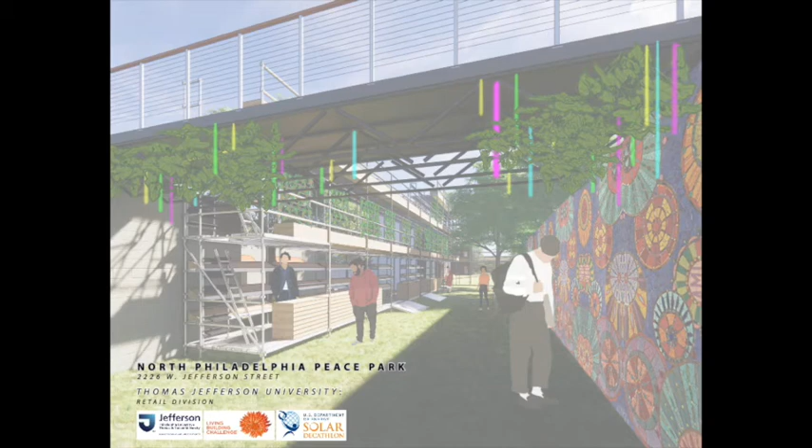Our project is called the North Philadelphia Peace Park, located at 2226 West Jefferson Street in Philadelphia, PA. We're the Thomas Jefferson University Retail Division of the Solar Decathlon.

The North Philadelphia Peace Park is an existing park located on Jefferson Street in the neighborhood of Sharswood of North Philadelphia. This site was once trash-filled lots, until local Sharswood residents created Peace Park in 2012 by developing a garden in the shape of a peace sign. Since then, the North Philadelphia Peace Park has been utilized by its local community to expand cultural and horticultural advances to the region through local events.

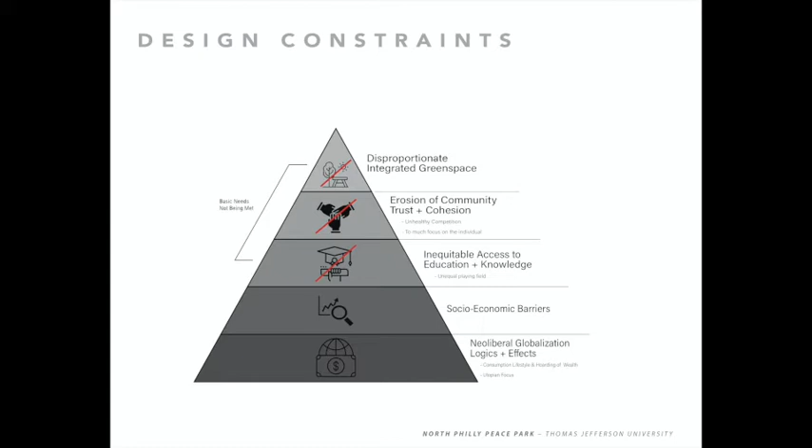The basic needs of this community are not being met. This is seen through the disproportionate integrated green space, erosion of community trust and cohesion, inequitable access to education and knowledge, socioeconomic barriers, and neoliberal globalization logics and effects.

This region in Philadelphia is a part of a largely underfunded area that is mostly owned by the local housing authority, Philadelphia Housing Authority. This has led to low local development and an influx of gentrification in the area. PHA has recently made a commitment to allowing Peace Park to not only remain, but expand across the whole block. Peace Park and the local Sharswood area strives to maintain and grow a community-centered space that can provide a home for its cultural, horticultural, and educational events.

This project will serve the local community through repurposing current buildings on site and providing produce to the local Sharswood community, which is in a food desert. Based on the team's analysis, the walkability assessment shows lack in markets and/or grocery stores within the community. This makes it very difficult for residents to have access to fresh produce.

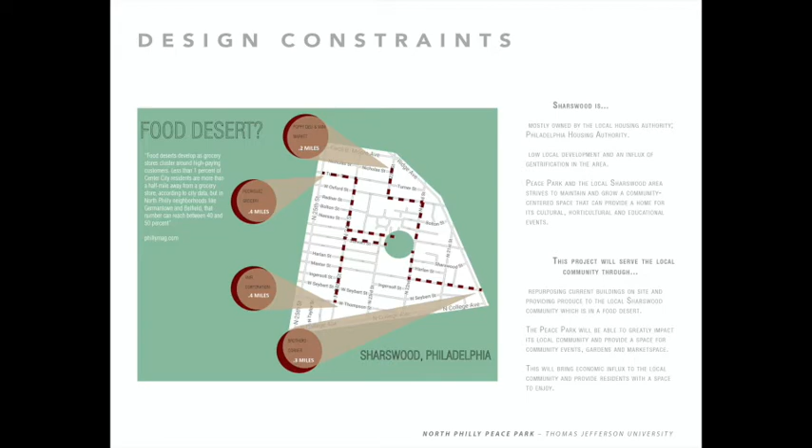The Peace Park will be able to greatly impact its local community and provide a space for community events, gardens, and market space. This will bring economic influx to the local community and provide residents with a space to enjoy. Eliminating the stress of affording food for a local community will give Sharswood residents one less challenge to face.

The design goals for this project fall around our 10 core values of ethical housing design, which include the centralization of small-scale communities, urban permaculture, expanding the access of greener urban landscapes, housing security, aging in place, regenerative architecture techniques, shared spaces, site-specific design, and multi-generational and multicultural interactions, which will all help to create a new ecological dialogue through community-based design of urban agricultural retail.

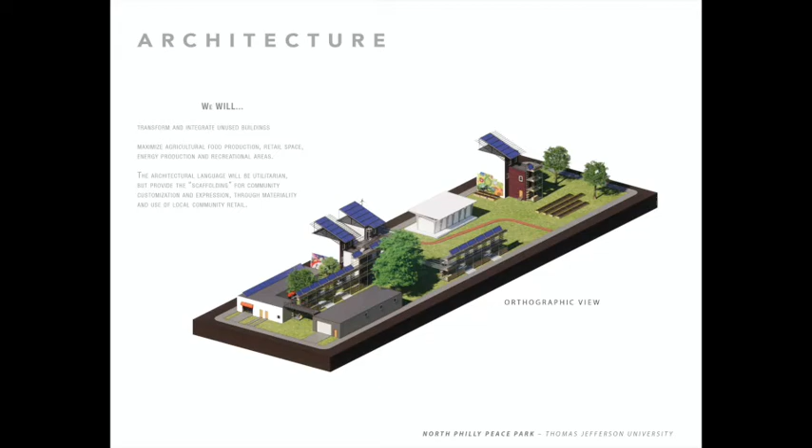The team will transform and integrate unused buildings for the benefit of the community, as well as maximize agricultural food production, retail space, energy production, and recreational areas. All of this will be accomplished while developing a stronger connection between the natural environment and the local community. The architectural language will be utilitarian, but provide the scaffolding for community customization and expression, not only via the aforementioned murals, but also through materiality and the use of local community retail.

The site is programmed to include several activity types such as outdoor agriculture, arts and design classes, a library filled with history and sustainability books, a community-run kitchen, and an indoor flexible market. The interior design is a mix of Afrofuturism aesthetics as well as a modern utility. The appliances in the buildings consist of refrigerators, toilets, sinks, bathtubs, and a full commercial kitchen setup. Allowing all of the interior spaces to be flexible, besides the kitchen, the community is at liberty to use the buildings to suit their current needs while being able to adapt for the future.

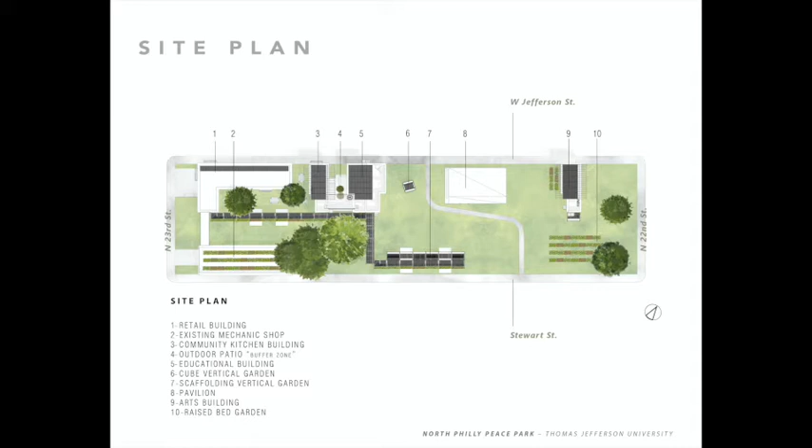The site plan of North Philadelphia Peace Park starts at the top left, which is the retrofitted building, which will become the retail space. Below that is the existing mechanic shops, followed by a cluster of buildings in the middle, which consist of the community kitchen building, outdoor patio, which we call the buffer zone, and an educational building. To the right of that is the cube, which is an experimental vertical garden, and below those are the scaffolding experimental vertical gardens. There is an Afrofuturism outdoor pavilion space for community gathering, and the building on the far right is considered the arts building, where there will be design and art-based community classes, and there are raised beds throughout the site.

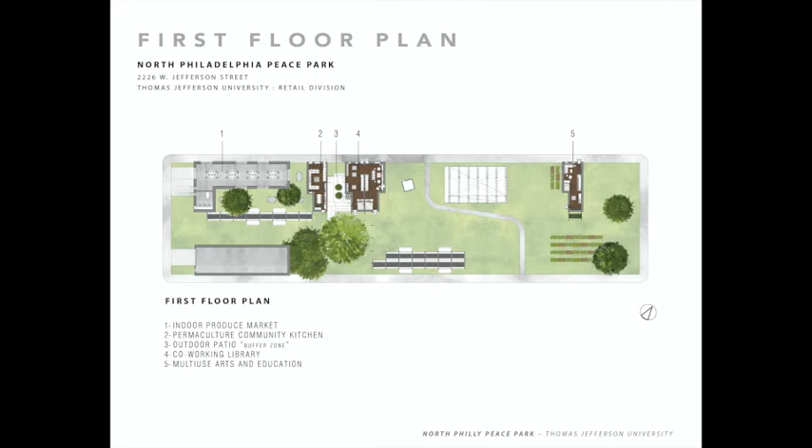The first floor of the retail building is where the indoor produce market exists. The permaculture community kitchen is the area where all of the produce and agricultural goods from the site will be processed, cooked, stored, and created for them to be sold in the indoor produce market. In the educational building, where there is a co-working library and a multi-use education and arts classroom area, is where we will foster the community to be able to produce the goods for and learn about the goods being used in the produce market. The very far right building is a multi-use community space as well.

The second floors of the pre-existing townhomes of the site also have multi-use formats. On the left side building above the community kitchen is an existing tenant on the second and third floors who is planning to stay there. In the educational building on the second and third floors, there are business incubation spaces that can help foster new wealth and new learning.

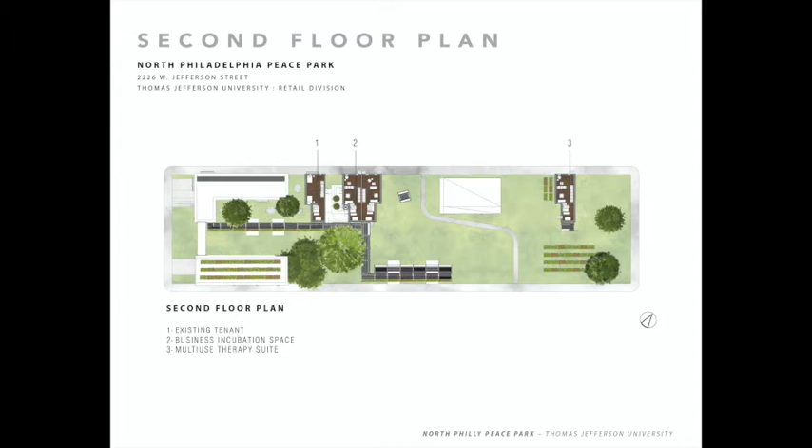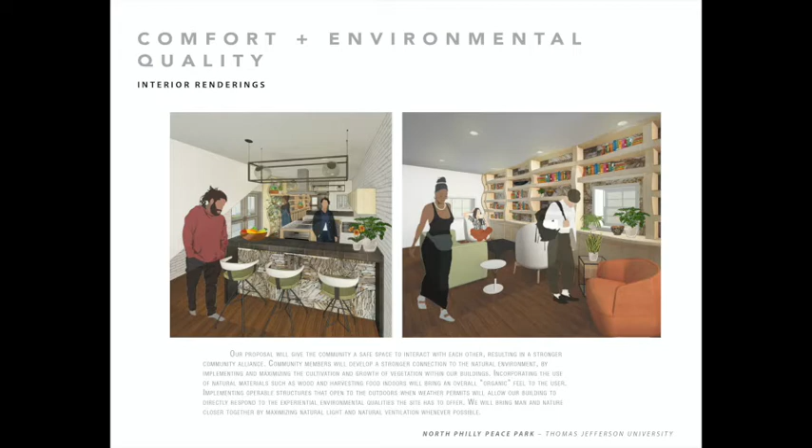And in the far right building, there is a multi-use therapy suite that will be used for group sessions as well as private sessions. Our proposal will give the community a safe space to interact with each other, resulting in a stronger community alliance. Community members will develop a stronger connection to the natural environment by implementing and maximizing the cultivation and growth of vegetation within our buildings.

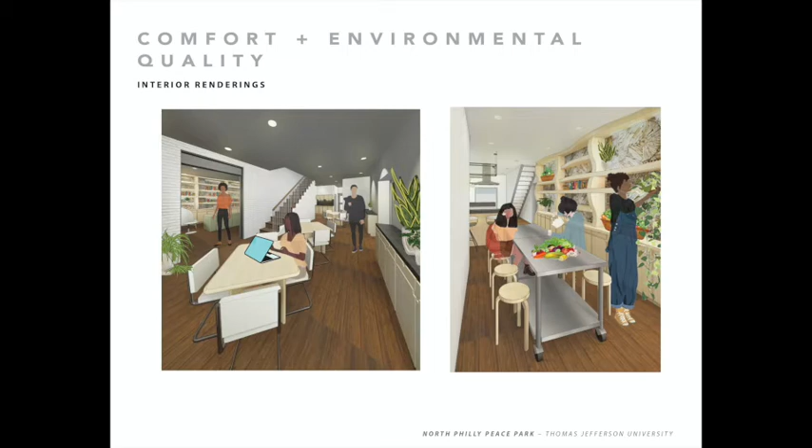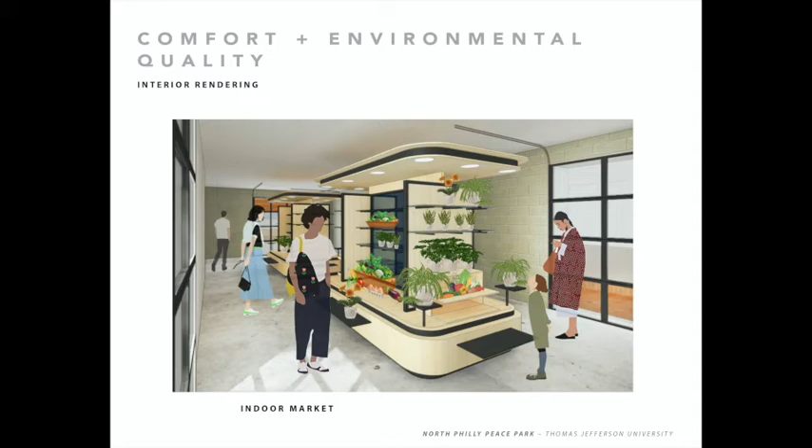Incorporating the use of natural materials such as wood and harvesting food indoors will bring an overall organic feel to the user. Implementing operable structures that open to the outdoors when weather permits will allow our building to directly respond to the experiential environmental qualities the site has to offer. We will bring man and nature closer together by maximizing natural light and natural ventilation whenever possible.

We will strive to lower our embodied environmental impact by restoring and repurposing existing buildings and/or materials on site. By giving preference to local materials and local labor, we will be helping the community and the environment as a whole. The community will be directly involved in the construction process. Our ultimate environmental goal is to maximize rainwater collection, solar energy, and potentially wind energy production on site.

Durability and resilience. The existing buildings are made primarily of brick and CMU. These building materials will last a lot longer than what a traditional developer in this area would use, typically stick frame. The structural lattice work we are providing via the scaffolding will create an additional protective layer around the external surfaces of the buildings, extending their lifespan and making maintenance much easier and less expensive.

Biofiber will be used in place of the existing insulation. Biofiber is rated at R40. With its ease of construction capability, it can be easily used in place of the existing insulation and fit in between the existing wooden studs. Biofiber cleans the conditions of CO2. In addition, biofiber also acts as a moisture barrier, combating the harsh humidity climate that will occur.

The wall detail shown here gives an idea of what the wall assembly is made of. Starting from the exterior, you have the existing brick. Then you have an air gap before meeting the new biofiber insulation that is placed in between the existing wood studs and then finished with new drywall at the interior.

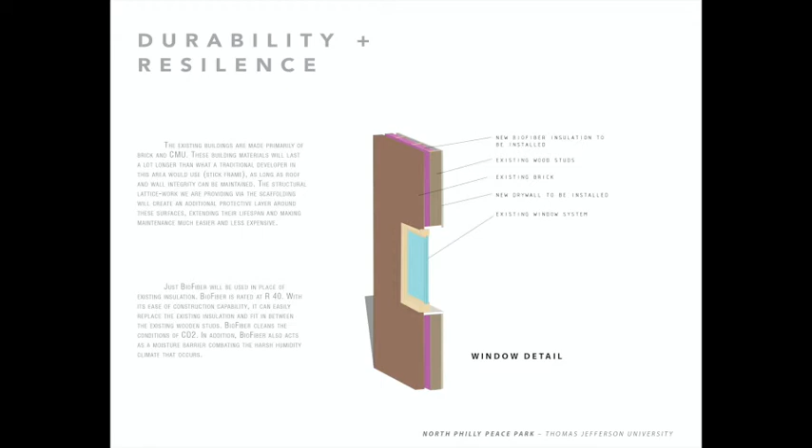The roof detail shown here illustrates the existing roof structure, a new air barrier at the roof deck, 2 layers of rigid insulation, a 1/2-inch coverboard attached mechanically through insulation to roof structure, a leak detection grid, adhered waterproofing membrane, a root barrier, protection and water retention mat, a tray system, a filter sheet, a growth medium, and the green roof planting.

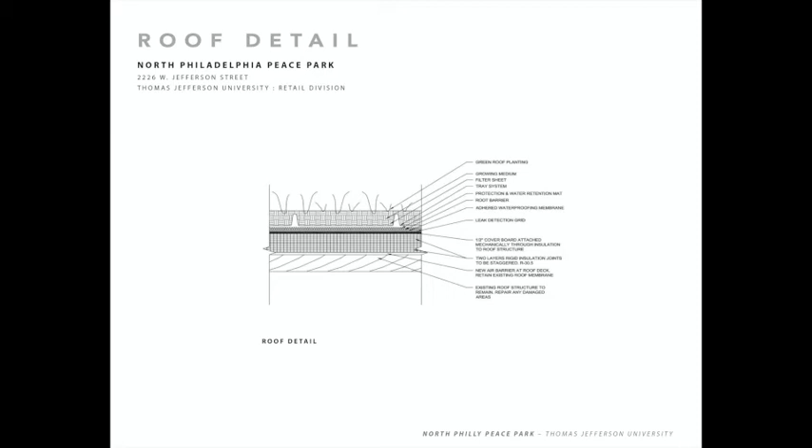We are implementing a scaffolding structure that will be engineered to become a permanent structure. The building envelope of the retail and garage building consists of CMU structure, and the remaining buildings are made up of a brick structure with the use of the biofiber insulation.

This is a detail of a scaffolding system consisting of 3 modules: the base module, the mid module, and the top module. It represents how this system can be made permanent by adding footings to it, and how we've converted it to be able to accommodate vertical farming, as well as the collection of energy through solar panels. The 3 renderings represent the 3 different phases that the scaffolding system will go through.

Phase 1 is a completely open system, just accommodated for vertical growing, which will be able to expand the growing season by a little bit. Phase 2 will introduce polyethylene to cover up the structure and make it an enclosed system to expand the growing season for a couple months. And finally, phase 3 would introduce LED lights for indoor farming, which would allow them to extend the growing season to all year round.

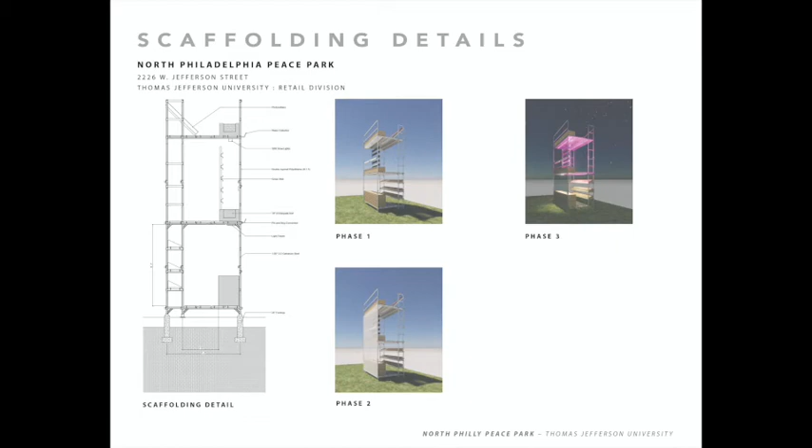When it comes to energy performance, photovoltaics will be the main source of energy to the entire block and to sell the excess back to the grid. The collection and storage of rainwater on site will provide for irrigation systems and the needs of the block. Along with on-site agriculture growing, the intention is for the site to become self-sufficient.

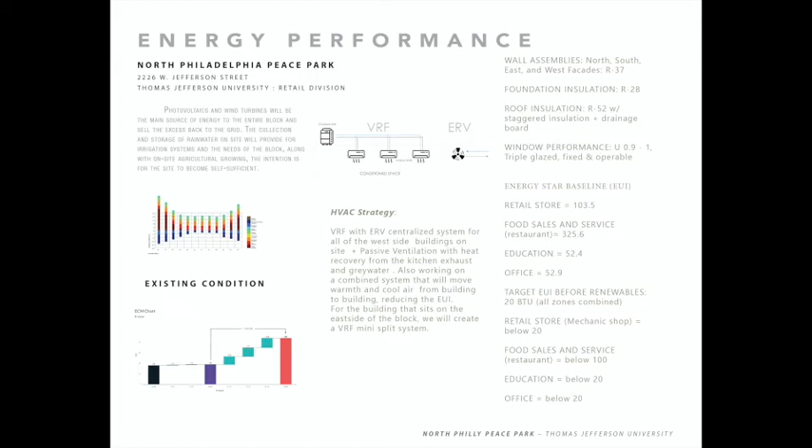To lower the EUI of the current state of the site, we've implemented a VRF with ERV centralized system for all the west side buildings on site, and use passive ventilation with heat recovery from the kitchen exhaust and gray water. We're also adding R37 biofiber insulation, which will also help lower the EUI considerably, as shown in the following chart.

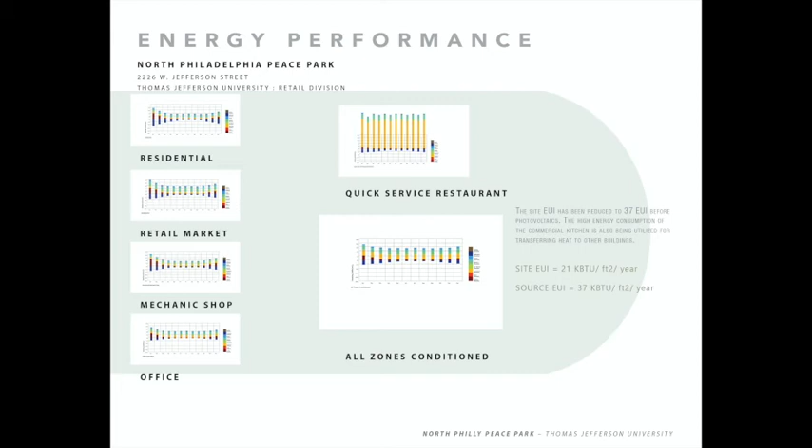The following charts represent the EUIs broken down by property type, as well as the combined EUI for the whole site. The site EUI has been reduced to 21 kBTU per square foot per year before photovoltaics. Thanks to the new HVAC system, the high energy consumption of the commercial kitchen is also being utilized for transferring heat to other buildings, which helps lower the site EUI as well as the source EUI, keeping it at 37 kBTU per square foot per year. We have 144 solar panels on site with a possibility of expansion.

The solar panels not only cover all the site's needs, but are also able to generate 130 kBTU per square foot per year. With that energy, not only do we meet the site's needs, but we can sell the excess energy produced back to the grid, as well as providing for the scaffolding system energy demands.

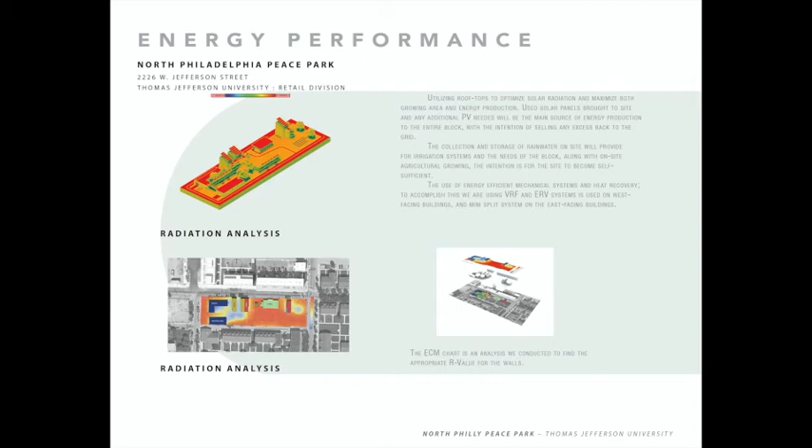The structures designed to hold the solar panels are angled at 25 degrees and maximize the number of solar panels per area, while avoiding being shaded by neighboring panels, maximizing their performance. The structure also cantilevers over the edge of the buildings to provide shade in the summer months for the windows located on top of the buildings.

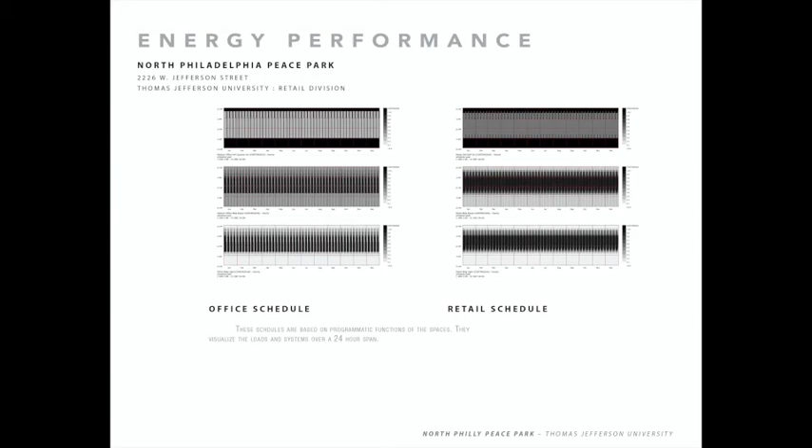These hourly schedules are based on programmatic functions of the spaces and the load of people throughout the day. They represent the energy being used by the different systems throughout the year, which helps us identify the times of the day that require the most energy, and where that energy consumption can be reduced.

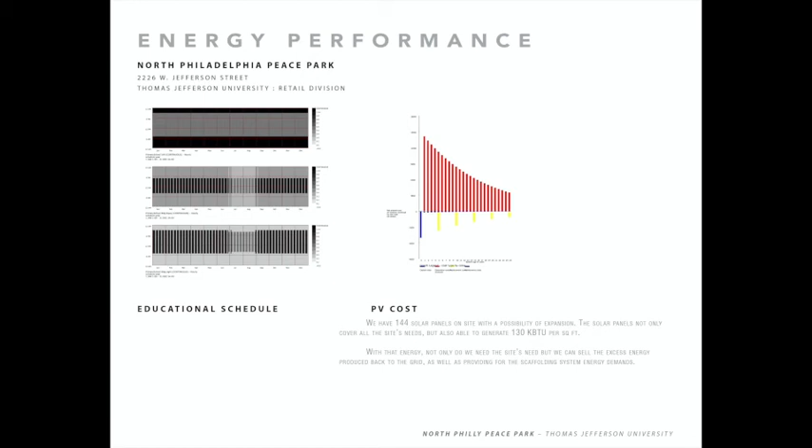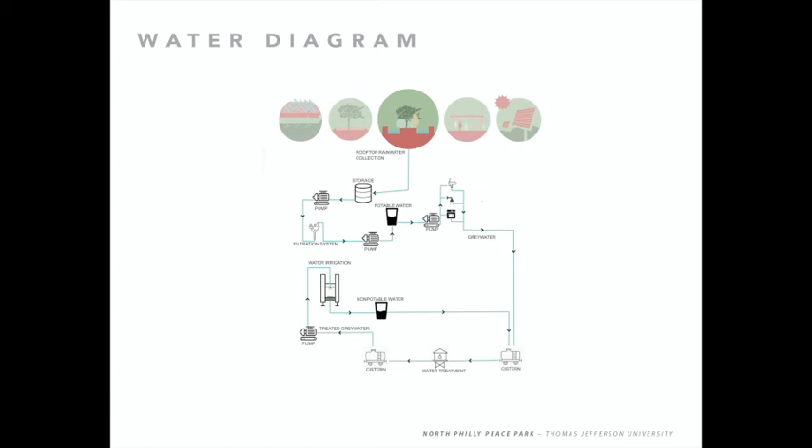This diagram shows how energy moves throughout the site, starting by being collected by the solar panels and stored in batteries, then used in the buildings and the scaffolding, which is also able to generate energy on its own. The line is also connected to a meter, which is connected to PECO, to be able to supply more energy when needed and also sell back to the grid.

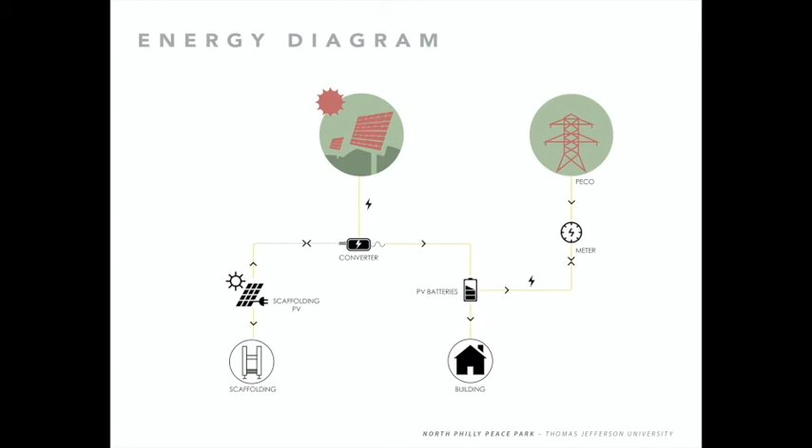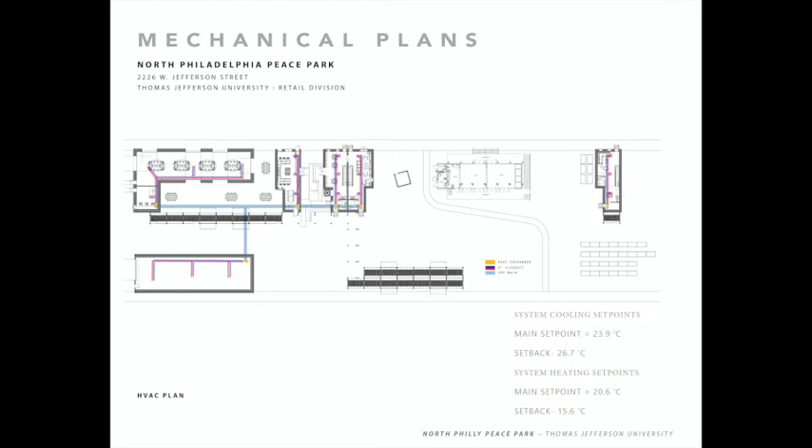The HVAC strategy implemented will be a VRF with an ERV centralized system for all of the west side buildings on site, plus passive ventilation with heat recovery coming from the kitchen exhaust and gray water. We are also working on a combined system that will move warm and cool air from building to building, reducing the EUI. For the building that sits on the east side of the block, we will create a VRF mini split system.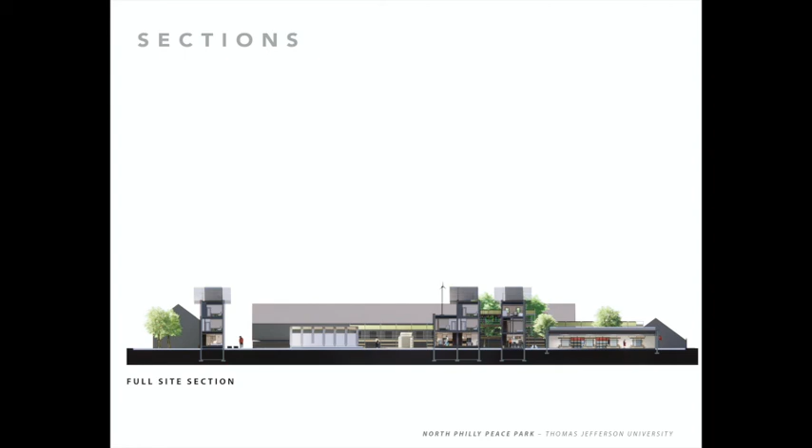The integrated performance of the site speaks to our 10 core values of ethical housing and community-based design. Site-specific raised beds and the scaffolding system create a space not just for urban permaculture, but structures for photovoltaics, wind turbines, and water collection systems to maximize the site's goals. Aging in place standards are met with the existing mechanic being allowed to stay in business. Housing security is met with the existing tenant in one of the row homes being allowed to stay.

Shared spaces are seen in all of the retrofitted interior uses like the community permaculture kitchen, co-working libraries, and educational meeting zones. The centralization of small-scale communities is seen in the Afrofuturism outdoor pavilion because it was designed by a local community member for outdoor public gatherings. Multicultural and multi-generational components are scattered throughout the entire site with the Philly Mural Arts programs, and regenerative architecture techniques are used in the adaptive reuse of the existing buildings, ethical energy, water collection and consumption, and urban agriculture scaled to the entire site.

Overall, the most important aspect of our project and design values is the creation of a new ecological dialogue through community-based wealth, all gained by urban agriculture that is highlighted by the retail farmers market of North Philadelphia Peace Park. We thank you for this opportunity to co-design with an amazing and engaged community in hopes for a more systems integrated and greener future. Thank you again.